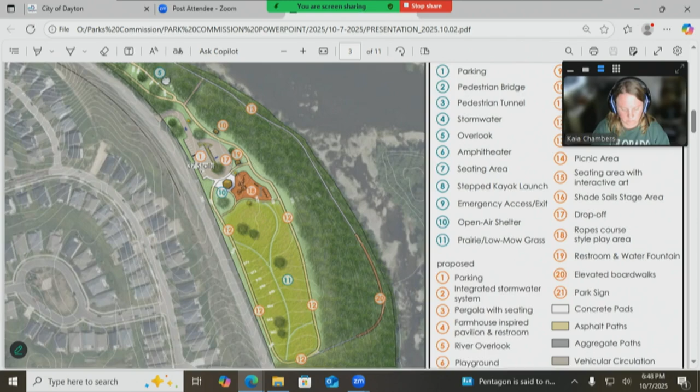Now that we've done a quick overview, we'll circle back to the two enlargement areas to take a look in greater detail at some of those. So this first, let me zoom out a little bit here.

This first enlargement area is where we're taking a specific look at the historic features. This will really focus on the history of Elsie Stephens Park, and to that we propose to reutilize the existing silos as either concessions, rentable facilities, or repurposing as a restroom facility to support the splash pad and the play area. The existing stone foundation remnants from the barn will be repurposed into what we think is a really unique play opportunity.

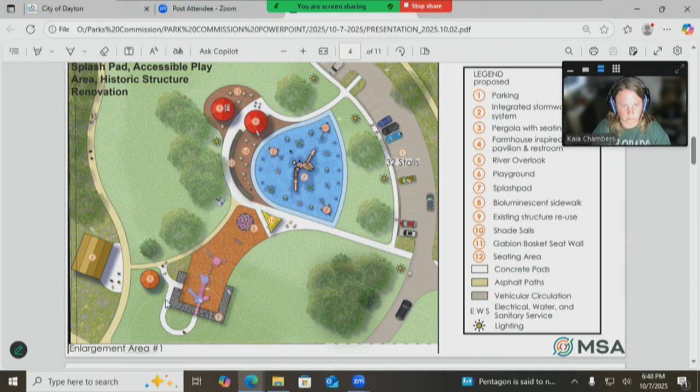Since that's a sloped foundation, or a sloped ramp up to the top of that existing foundation, there's an opportunity to do a really cool accessible ramp so you can have multiple accessible levels of play in the same play experience, taking advantage of the fact that that's just really cool.

Throughout this area, we're proposing more shade structures as well as tree plantings to help create shade over the play area and to support the splash pad.

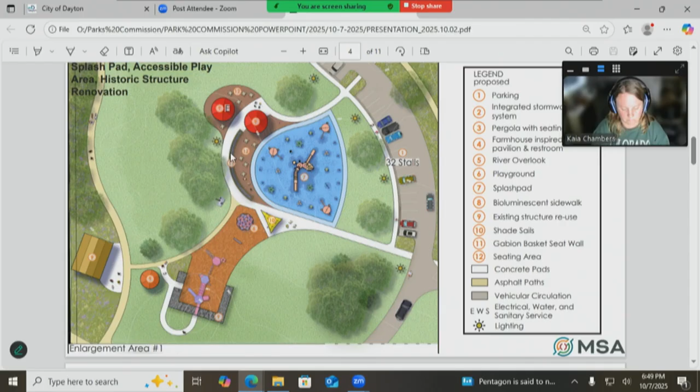To separate the spaces from the path and the splash pad, we're proposing a gabion wall structure. We've got some pictures of that later on to tie into that stone foundation wall and create that continued sense of history. The old barn will see new life as a proposed picnic shelter or facility of some type, whether that's an interpretive center or a shelter to support people coming along the bike path.

This area directly adjacent to the splash pad play area will have about 32 stalls.

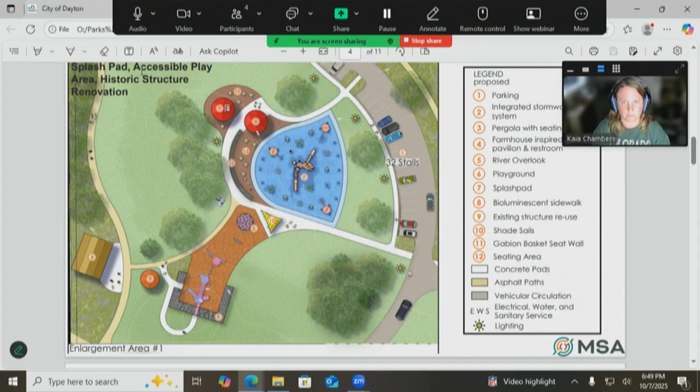There's another additional 12 stalls proposed up by the kayak launch, and another 10 or so that just aren't on this part of the slide.

Moving into the heart of the park in this enlargement area, this is where a lot of activity is going on. The main structure, the pavilion, we're showing as 7,000 square feet. This will have room for restrooms and concessions, and fit about 200 people standing or 120 seated if there's a need to hold events. With the grade change here, this allows the building to be 2 stories, like the house that's out there now, with a walkout space underneath that could be used for storage as needed. That also allows this upper area to maintain great views out to the river and to the stage and amphitheater.

Moving through the park, this gray area we're showing as a bioluminescent pathway. That aggregate gets seeded onto the top of the concrete and has a 20-year lifespan, but we feel this will give the park a unique feature that other places don't have, adding to the experience for people coming here for concerts at the stage.

We're showing the expanded amphitheater area, continuing from where it currently sits. The stage will be enlarged from approximately 700 square feet to what we're showing as 1,600, a little more than double, giving the opportunity for more acts and larger acts to perform, with an expanded seating area.

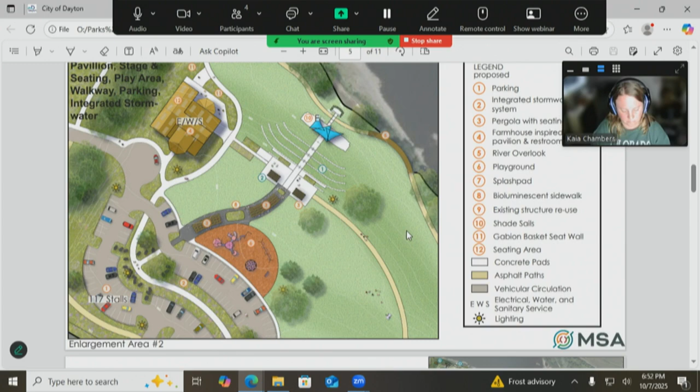Now I'm going to run us through the big numbers part of it. Big dreams, big ideas come with a price tag. So to help with that, we've broken it down into 5 separate individual phases that don't necessarily have to depend on each other, with the exception of Phase E.

Phase E, being the pavilion structure, obviously needs support facilities like parking to exist, but otherwise there's no prescribed order. They're just simply lettered going west to east for the most part, by the geographic position of the parts. There's no order, it's simply geography with the exception of the pavilion.

So some basic assumptions before we get into this part: these estimated costs are all in 2025 dollars with some contingency included. For the play area and the repurposing of the historical structures and foundations, we have an allowance currently in there. Some of those structures we recommend further architectural study to get a very accurate idea of what those costs would be.

So we have provided an allowance for those repurposing costs currently. Overall, all phases combined, we're estimating between just shy of $17 to $20 million. Phase A will contain the bulk of the costs for extending water and sewer service to the park to support the splash pad. Historic structure renovation costs are an allowance only and will require further evaluation. As a note, the play area cost included here utilizes poured-in-place surfacing instead of loose engineered wood fiber. Phase B will also contain some reconstruction costs and minor repairs to the existing paving area.

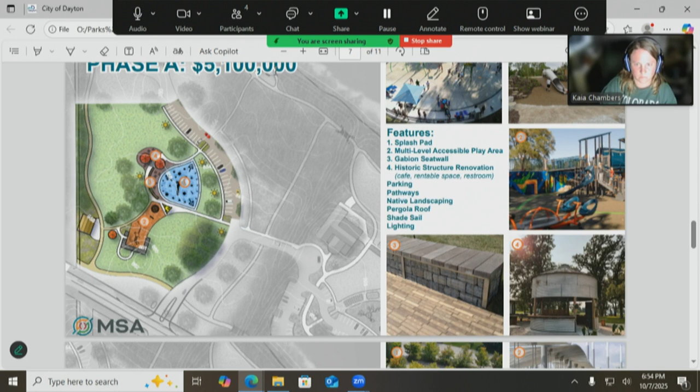So we'll roll into this because this may be a better way to take a look at it. This is what we're labeling as Phase A, which is what we looked at in Enlargement 1. It's the play area, splash pad, historic structures renovation, as well as additional supporting parking and pathway connections out to the rest of the park. This spur here moving out towards the river would be proposed as well.

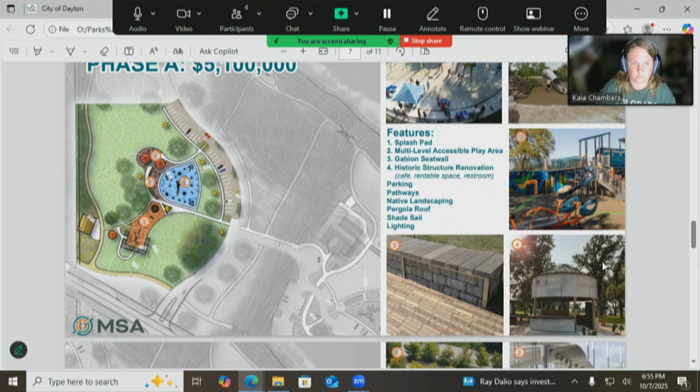So this features the splash pad and the multi-level accessible play area, which you can see in the two pictures on the right-hand side. We're also proposing a gabion seat wall to separate the seating area adjacent to the splash pad from the pathway through the area, also to connect the sense of identity through the park. And the fourth image on the slide here is a potential, conceptual idea of repurposing the silo structures.

So Phase A, we currently have estimated at a price tag of $5.1 million, and again, that includes only an allowance for the historic structures currently.

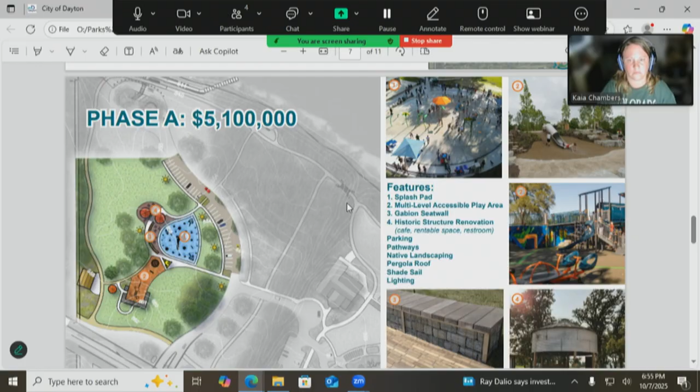Phase B is the bulk of the parking at the center of the park, as well as the expansion of the amphitheater area, the bioluminescent pathways, swinging benches, and this expanded play area.

A note: the parking expansion here also includes the bulk of the stormwater management for this park. With the increase in impervious surfaces, there'll be a need for stormwater management. We've accounted for this by taking the stormwater needs into account in the center of the parking lot. So instead of just getting a sea of paving that's divorced from the rest of the park, you're integrating the stormwater and the parking into the park, keeping that identity of a more natural setting.

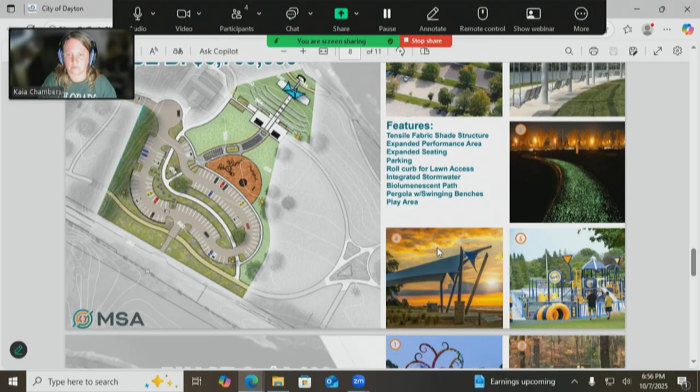So the price tag, or the current cost estimate, for this Phase B would be $3.7 million.

Phase C would be the pathways connecting the two parts of the park, as well as the interactive art and seating opportunities here. This cost estimate also includes the boardwalk overlooks and potential fishing area access along the river, as well as the mowed pathways through here. I should mention all of these phases do include some additional lighting as well.

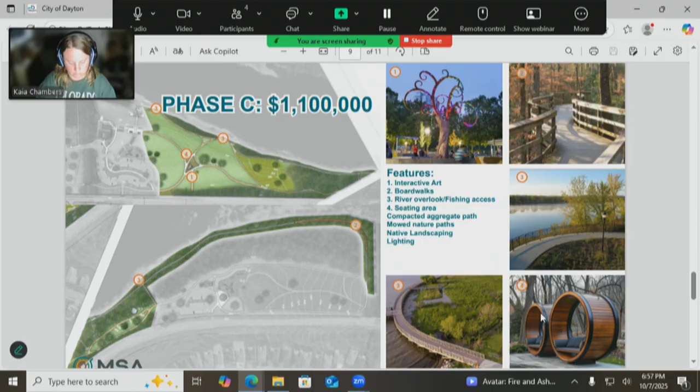Moving on, here are just some fun conceptual ideas for what you could dream about for interactive art. A Tree of Life type image is shown in the upper left. Boardwalks and river overlooks are shown in images 2 and 3, and then some potential interactive art seating opportunities. Could be kind of fun looking out at the river while sitting in the binocular eyes there. Real photo opportunity.

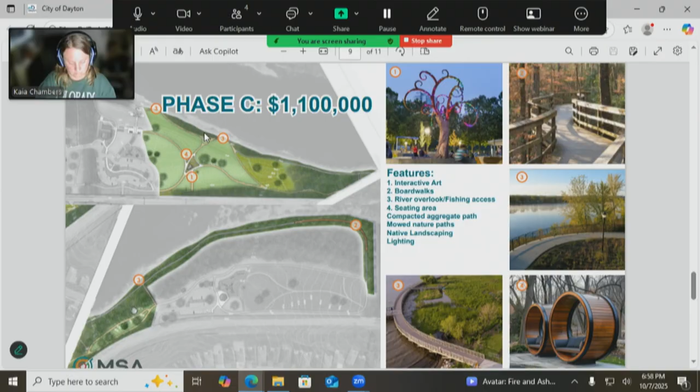What we're calling Phase C here, we currently have estimated at $1.1 million.

Phase D is the expansion of the Cloquet Overlook opportunities. This is the Mowed Nature Path, the ninja-style ropes course experience up top. The expanded restroom facility is along the pathway with the distance markers, so you can mark out about a third of a mile and do 3 laps about to get your steps in. There are opportunities for fitness stations along the pathway as well, and then the additional restroom facilities up here.

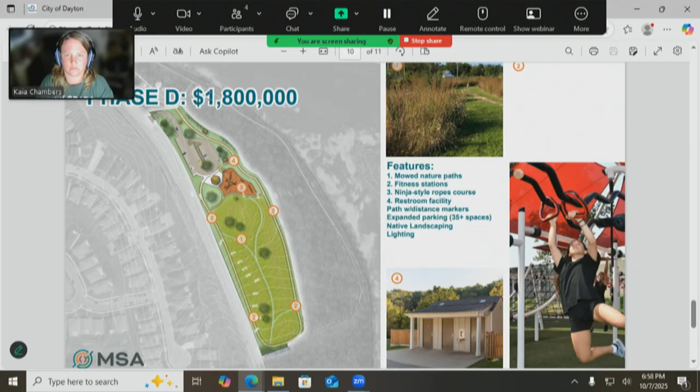This also includes expanded parking - should have mentioned that. We've got about 40 spaces in here. The current cost estimate for Phase D we have at 1.8 million.

And then the biggest single ticket phase here is Phase E - this is the pavilion expansion. Like I mentioned, we're showing this currently as a 2-level potential space. This image in the middle shows what that could be: you've got the overlook and the deck up top, and potential maintenance storage down below. The cost for this is really going to depend on several factors.

The cost for this building is really going to depend on the type of building, the interior needs, the build out, and obviously the systems. If you have an enclosed building and heated spaces, that's a higher price tag than an open pavilion style building. So we showed a range of prices for this building for this phase from 5.2 to 7.3 million. Building costs for this part of the phase would be between 3 and 4.5 million, again depending on building type.

So that is the end of the phasing here.

So I'll move back up at the top, and I'm sure there's probably some questions out there. Questions, comments? Starting off with phase E. Let's get into it. Love it.

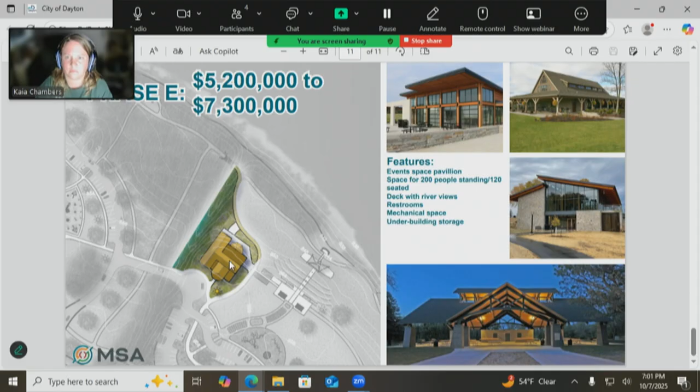Would it be overlooking the river, or would it be sideways? Let me zoom in a little bit here. So your main entrance to the pavilion structure would be through here, off the parking lot. This back area could be an open structure, so you could have a covered deck type area, with garage door style panels you could flip up for open space as well. But that's the general conceptual idea — this would be your potential open space, with views out to the river.

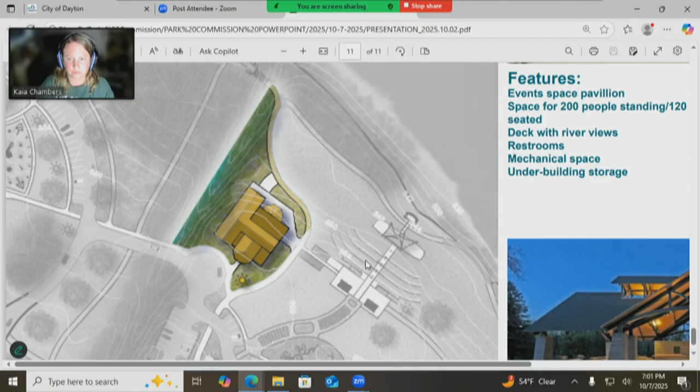You say it's 5.2 to 7.3 million. Given the lowest picture where it's completely open air, what would that price tag be compared to? That would be closer to the 3 million building. For a plain, nothing building? Yeah, this one is more for a style idea. There would still be some restroom facilities as part of this building, and a mechanical room. I didn't want to do that.

But yes, a more open air structure would be sort of that lower end, we'll call it the base range.

I personally love the idea of bringing some of the old aspects in. I talked at great length about that at the last meeting, so I'm not going to beat a dead horse on it, but I do like the idea of us bringing some of that to be used. I know the prices are estimates because I see a stop sign listed at $500 — I'm guessing, Marty, you're not buying $500 stop signs, but if you are, I want to be that supplier. I know some of the numbers will be lower once it goes through and some will be higher, so I do appreciate all the numbers here.

I'll make a note on the cost estimate spreadsheet you see in your packets — you may notice some line items are still highlighted. Those are ones we want to continue to investigate and fully flesh out before we consider them accurate and appropriate. Some of those allowance numbers are in there as allowances, and we've included a fairly robust contingency. As we get more firmed up on the design, those numbers and the contingency will shrink as well. Yes, thank you, Marty.

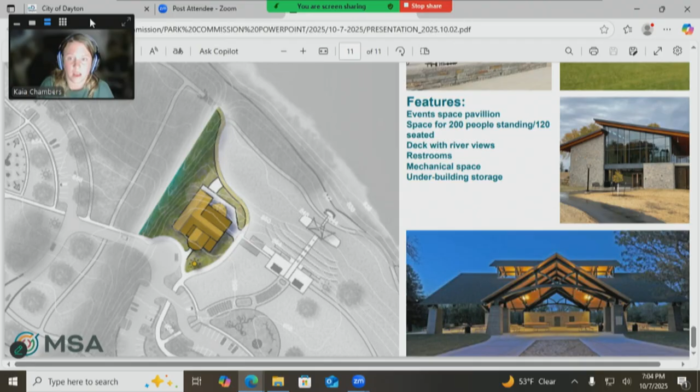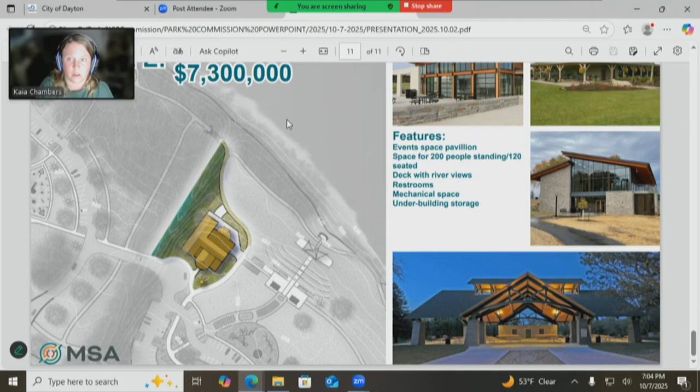I don't know if everyone can hear me, but I have two comments. First, I feel like you did a really good job listening to all of our feedback and incorporating it well. Second, from an initial reaction perspective, I see this as something that would really draw people to the park from all around. Even little touches like the bioluminescent pathways and the interactive art — that's the kind of stuff that gets you featured in stories and magazines, and then people go, oh yeah, that's cool, I want to go check that out. So I think that's really, really unique. Thank you, Kaia, I appreciate the feedback.

So I do have a question, because you talked about putting in a ropes course up at Cloquet. There's already a playground there, so I'm curious, Marty, from your perspective, what's the estimated time when you'd replace that anyway? I kind of feel like the ropes course is awesome, but if we already have a playground there, why tear it out if it's still good? From a safety standpoint, it's generally 20 to 25 years for a playground.

That one was put in, I'm guessing around 2008, just after I started here, so it's coming up to replacement. Okay, that's great — I just wanted to make sure that if we do that, we're doing it in the right timing. I think it's actually on our CIP for replacement in 2028 or something along those lines. Okay, thank you.

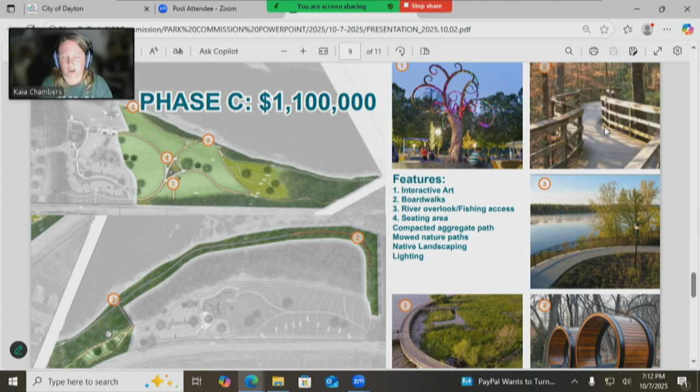That's what I was thinking, that there could be some really cool naming ideas. Realistically, you could also do something similar with that art structure, the interactive art area, like they did at Allianz Field, where they put all of the donor names on the giant MNUFC logo. You could definitely figure out how to make an art piece that integrates donor names too.

And it's like, if it comes to us to approve this, it's going to be $20 million, but between grants and sales we came in with, it's only going to be $10 million. Yeah, that totally changes it for taxpayers when we're looking for additional help. For sure, yeah, I think trying to reduce the burden to the city is part of the whole process.

It's very difficult for a city like Dayton to raise $20 million for a project like this. So that part of the build-out, just like the water trails, there's going to be asking for grants left, right, and center, and that's the way this thing is going to get done.

Is there any thought to bringing it to the EDA to see if there's any businesses that want to start sponsoring? I haven't heard anything from EDA currently. John, is that anything that you... But I think this is probably the first project we've had that is the right project to start asking for those funds.

Yeah, a neighborhood park isn't really what they're going to put their name on. This is going to be a destination, so it'll be attracting people and giving them some good advertising. I know a lot of larger corporations will have a foundation that donates money to different causes, but they're causes that are in line with that corporation. So it's not necessarily Graco being a home community thing, it's what value fits, and I'm not sure what Graco would donate to, but certain companies only donate for certain causes.

That's one of the reasons we've got this shade structure here, to provide sight lines into both the splash pad and the play area. We've seen instances where there's a standalone splash pad in one area and a standalone playground in another, with not exactly ideal crossover. Someone wants to go here, someone wants to go there, and you have to move back and forth between spots. Having them right next to each other but still separated gives the best of both worlds while maintaining safety.

That's also kind of why we have this seat wall here, to provide some buffering so you don't get someone just screaming for the hill.

Thank you. And you said the bathroom changing area potentially could be the reused silo structures? Yeah, that's definitely one potential.

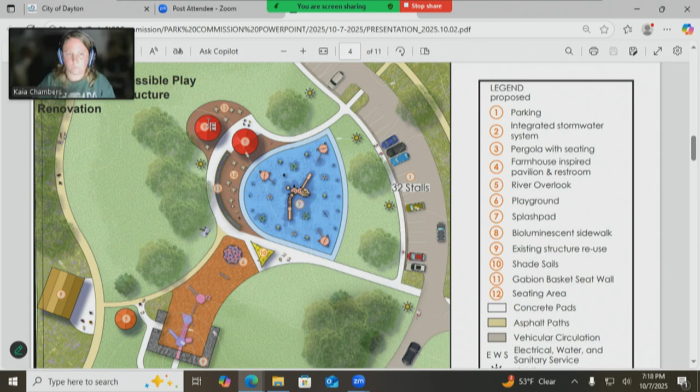You don't always see shower or restroom facilities with splash pads. A lot of times it's just standalone restroom facilities. I know Champlin's Andrews Park has not showers, but just like two stalls with a bench, and it's easy enough to hop in there and get changed. We're working on a splash pad installation right now at an existing park, and they're using the existing park building as the electrical mechanical unit room.

One last question - I know you talked a little about the plaza having that bottom area as storage and whatnot. Is there an option, I'm guessing there's a lot of options, that we could utilize that for another type of event, some type of space people could rent out, or additional bathrooms and stuff like that? It wouldn't have to just be storage, I'm guessing. Yeah, I think that's definitely part of the conversation moving forward with that.

Cool. Yes. Anybody else? Going once, going twice? Sold. All right, fantastic, thank you.

So what I need from you guys is I need you to vote to recommend this for approval to the council. I move to recommend this to the council. I second. All in favor, say aye. Aye. All opposed, same sign.

Fair enough, I was scared you were going to ask us to break out our checkbooks. That's later, David, that's later. Hey, as long as we get our money from coming here, we get a little plaque, don't we, for voting that in, right? It will be really small, nameplate size. Well, I just want to say thank you all so much for your comments, it's been great working through this with you. Awesome, thank you for all your hard work. We appreciate it.